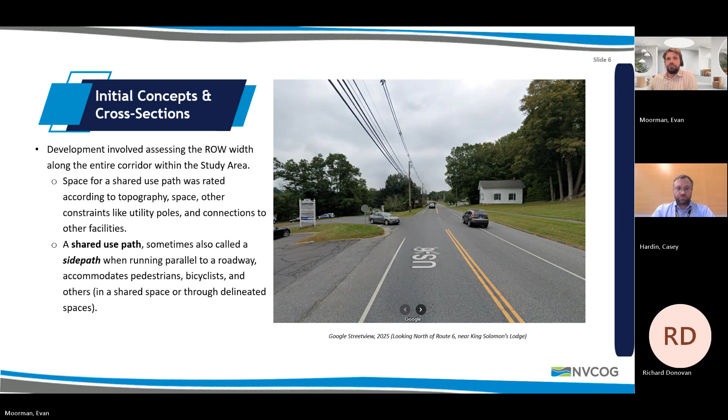We really want to use the design principles to sketch out what this would look like. Shared use paths can have a pretty wide range in width. They can go from about 8 feet, which is sort of an absolute minimum. When you're constrained, and ideally for a short period of time, you can have an 8-foot wide shared use path, and that still gives sufficient space for bicyclists and pedestrians, although they may have to slow down. So you go from 8 feet to about 12 to 14 feet, which is ideal. The wider the path, the more users you'd expect, so the wider the path you would want.

Paths can include a 4-inch center striped area, a yellow stripe, I should say. This is often used with heavy peak hour seasonal volumes. We've looked around at comparable routes in comparable areas, and we do not think this is necessary for Woodbury to separate out bicyclists and pedestrians.

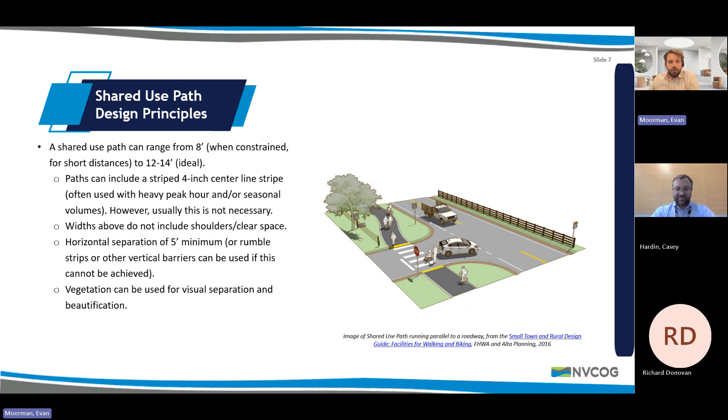Generally speaking, there's also a horizontal separation of about 5 feet at a minimum between drivers and users of the path. This is not always achievable, and if you're in a constrained space, you can use other factors like rumble strips or vertical barriers for small areas, which can achieve the same level of protection that a 5-foot offset would achieve. You can also use vegetation, which is nice, especially in a town like Woodbury, where the tree cover is currently present but also very valued, and we want to protect that. So vegetation can also play that dual role of beautification and providing separation between bicyclists, pedestrians, and drivers.

So here we're going to talk about pedestrian and bicyclist interactions on the shared use path. As I mentioned, they can be divided with that yellow stripe down the middle, but this is not done at the regional level—the Middlebury and Oxford Greenways do not use that center division line because of lower volumes.

We looked at the FHWA shared use path level of service calculator—it's a little dated, from 2006, but still used. It basically looks at volume. If you have one-way volumes under 100 people per direction per hour, it's totally fine not to divide it. As you get higher, you start needing either a wider path or a divided path. This isn't all or nothing—you can put a solid center line near corners with blind turns, or near railroad crossings. So we're going to strategically recommend providing solid center lines where they're appropriate, but not generally.

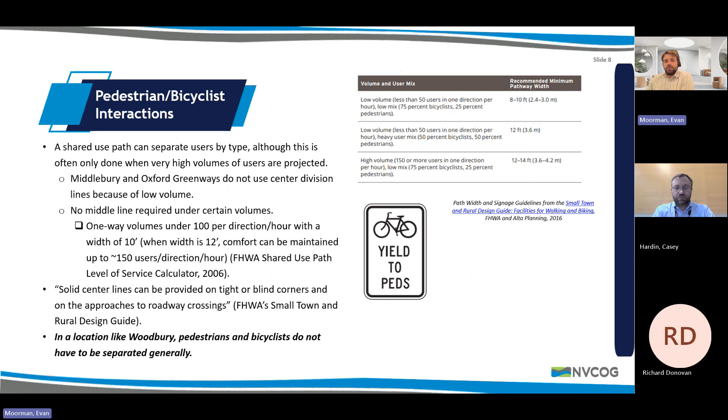I want to go through the right-of-way screening we initially did. We went up and down the whole corridor looking at parcel data in particular, but also street view data from Google and other sources, plus topography data. We went south to north along the corridor and rated whether there's space for a shared use path as best we could see. We have 5 different ratings: no, unlikely, possibly, likely, and yes, along each side of the corridor, east and west.

The east side here is on the south. As you can see in this southern section, it's a little better along the east side, largely because of some topography issues, but also, perhaps more importantly, there are a lot of telephone and power poles on the west side which would be difficult to route around or replace. So that was a very important criteria in the southern section of the corridor.

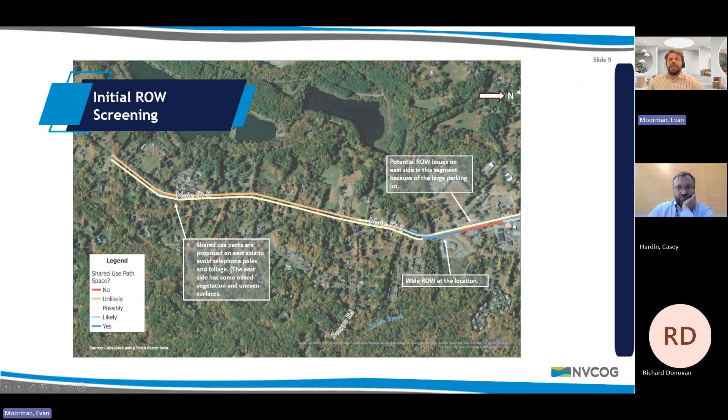Moving into the center section, we also rated it. As you can see, we're proposing that the shared use path would still be on the east side because on the whole it's scoring better.

As I mentioned, on the west side there's insufficient right-of-way caused by telephone poles, and in some areas a culvert. I'm not going to go through all these points, but you can see I've just called out issues and some of the factors guiding which side of the road we're proposing to place this on.

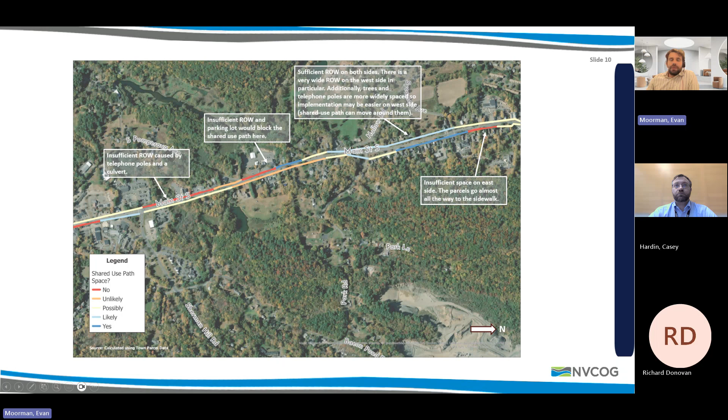It's not perfect. It's imperfect on the east side, though I mentioned it was better on the whole on the southern side. Once you get north of Hollow Road, we get some issues on the east side, and the west side starts to become better in terms of space and right-of-way issues.

So here we are moving north. Here's Washington Avenue, School Street, just to orientate you. So here I was looking at the right-of-way, and it looks like the west side would be preferable. On the east side of town, the east side is superior, and then near Hollow Park, the west side starts to predominate for being better.

As you can see, there's just more space for that shared use path on the west side than the east side. Again, we're sensitive to the historic needs of Woodbury. For example, on the east side of town, the pharmacy extends almost to the street, and there's a very limited right-of-way for a shared use path. That's one of the pinch points that encouraged us to go onto the west side, through the heart of the town, and that's where we end up here.

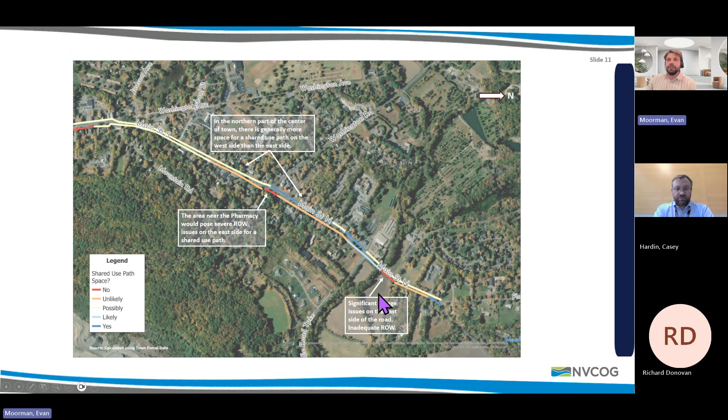Here is the river and the end of the corridor. As a general concept, we're proposing that shared use path on the east side in the southern part of town, specifically from the town border to Hollow Road, Doolittle Hill Road, Park Road area. At that point, it would transition over to the west side, cross the street using a new crossing, and use the west side of the roadway through the central section of town, through the business district, and all the way to the river.

We're also proposing major urban design improvements near Hollow Park to facilitate that crossing, but also to ideally make better use of that space now and boost access to it. We're going to talk a little bit about that later, and more specifically at our next meeting, about what we're looking for at Hollow Park.

And then we have other strategic intersection improvements, which we'll focus on more at the next meeting. Here's just a view of what this would look like in your town. We took two specific locations. The first is on the northern side of town, say between 317 and Mountain Road.

When we're on the west side of town in the business district, we show the existing right of way, in feet, and then we show the future right of way, what we're proposing. This may take some time to digest, but as you can see, we're using the same total right of way space, and we're just strategically taking space from what's a pretty big grassed buffer area, making a shared use path that's nicely buffered from the street, but also from people's homes.

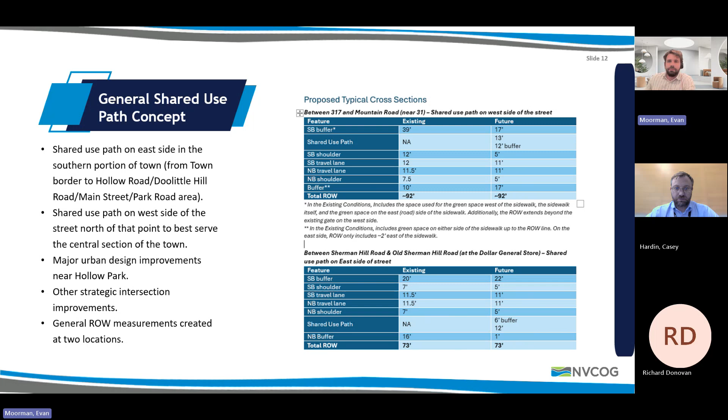So again, I just want to visualize this for all of you. This has call-outs corresponding to the specific intersection recommendations that we'll focus more on at the next meeting. But here we are beginning at the town line, the southern town line, I should say. We go on the east side of Main Street.

We propose to improve the crossing of Middle Quarter Road, adding PED signals, improving signal timing. So we hopefully improve safety, but also, to the extent possible, keep traffic flowing.

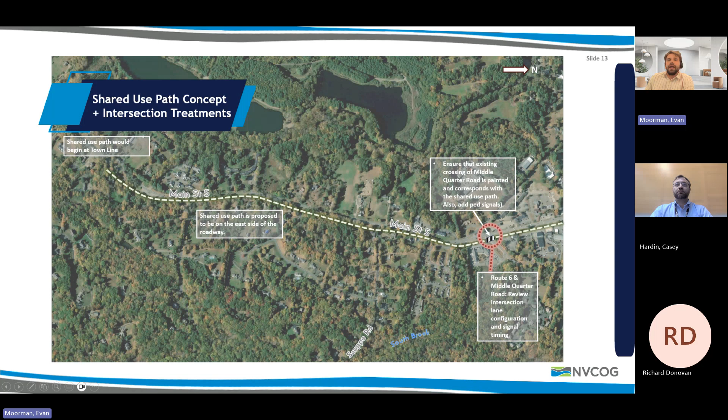Again, we're still on the east side, and then we would basically cross over near Hollow Road from the east to the west side. Here are those proposed changes I talked about at Hollow Park.

We're proposing at this sort of exit off of Main Street at Doolittle Hill Road, closing access to cars, making sure we give land back to the park, reconstructing a sidewalk along Doolittle Hill Road into a small 8-foot shared use path and linking to an existing sidewalk.

And then perhaps more dramatically, we were talking about realigning Hollow Road and directly connecting it to Route 6 with a more traditional traffic configuration, like a 4-legged stop or a signalized intersection. This would require reconstruction of the Woodbury Deli parking lot.

So this is sort of the general design. We are trying to improve green space, improve traffic function, but also take advantage of this crossing to tie the town more tightly to Hollow Park, which we've heard many of you say is a very treasured resource.

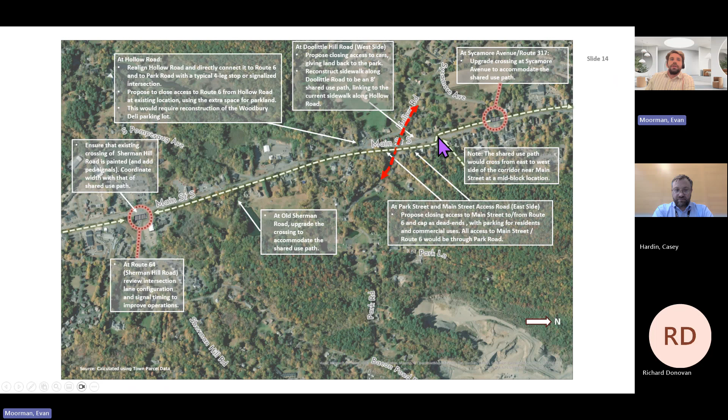We'd cross from east to west near Main Street at a mid-block crossing that would be likely signalized. And then again, we'd go on the west side of town north. Let me go on to the next slide. We'd be on the west side.

We would propose to upgrade the crossing at Judson Avenue. That's something we heard is dangerous and uncomfortable. So we'd try to improve that crossing in particular.

We'd be on the west side moving north using this extra right-of-way space here in front of people's homes. And then at Washington Road and Pleasant Street, we proposed to upgrade the crossing to accommodate that shared use path.

One thing we heard is there's issues at the pharmacy. We'd like to define that area a little bit better. So we're proposing granite curbing and parking striping at that corner pharmacy parking lot, extending the sidewalk northward on the east side. We're trying to strategically improve sidewalks as well as create the shared use path.

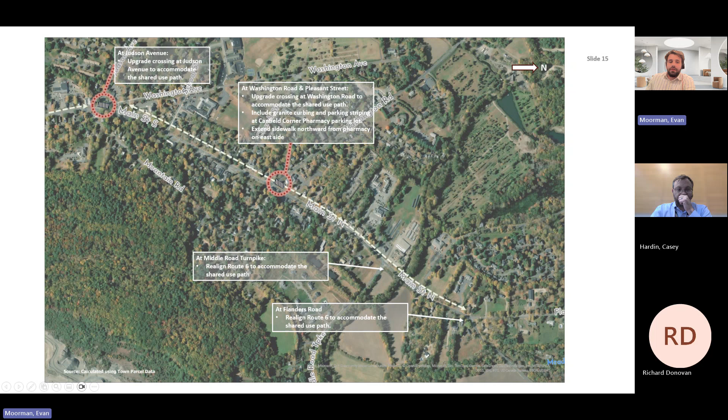And then we'd keep traveling north, crossing the river, and ending at Flanders Road, again on the west side of the road.

So I want to just summarize the intersection concepts, and again, these will be brought up a bit more in our next meeting. We are doing traffic analysis, and we're concluding traffic analysis for everything we're talking about here. At our next meeting we'll be able to tell you definitively what impact this will have, hopefully very minimal impacts on traffic.

But we're currently analyzing those operations at the following intersections: Route 6 and Middle Quarter Road. We were talking about narrowing the westbound approach for Middle Quarter Road, so making it better for pedestrians and bikers, while also keeping traffic flowing.

At the Hollow Road, Main Street area, we're talking about new signalized crossings, changing access points to the park. That was that intervention I talked about just a few minutes ago.

At Route 6 and Sycamore Avenue, we're examining a new left turn lane on Route 6. That's a concern we heard many times about people quickly going around into the shoulder area as people try to turn left. So we were thinking if we could provide a left turn lane there, that could significantly improve pedestrian safety.

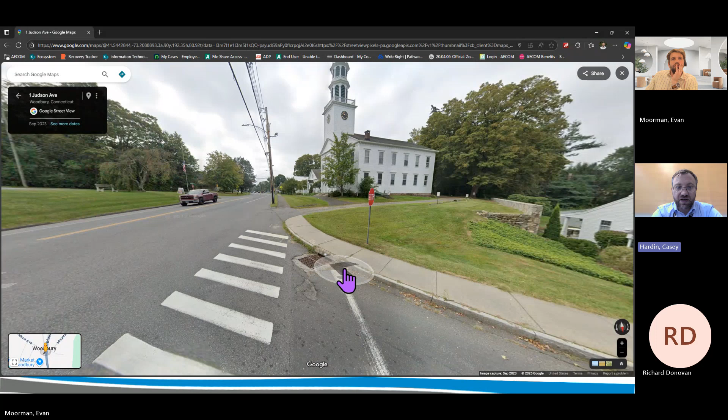I think as we look at the spot improvements, that intersection really flares out and the road widens to encourage that right turn movement. We may be able to better delineate how Judson approaches. Right now it's a glorified on-ramp, naturally flaring wider, and oh, there's a crosswalk and a stop sign. But every other clue tells the driver they may as well just keep accelerating and join Route 6. So maybe it's less of a turn-in to merge onto Route 6, and a little more squared up, forcing more of a stop and turn right.

Thank you for bringing that up. Because of the alignment of the side path, it's going to pull that crosswalk back as well, quite a bit, making it a lot more visible.

Does the shared use pathway replace the existing sidewalk? It's on that side, yes, so it would be on the east side until it switches over to the west side. That would be the pedestrian path, replacing the existing sidewalk. And then there are places where we'll still have sidewalk on the other side.

I can imagine a few places on the existing sidewalk where there's a tree right beside it. You'd have to have the path fall on one side of the tree, or go around the tree, or you'd have to cut the tree down.

What's the thinking about that? Some of those are questions we'll address more in the design phase than here in the concept development phase. But our goal has been to minimize the impact to any trees that exist out there now. I don't know that we could split around every tree, although it's certainly something we could look at, but wherever we could, we would move the path around the tree rather than cut it down.

I should add, in my right-of-way analysis, I did try to note where there were tree issues and where we could go around them rather than cut them down, because I know that canopy is important. Our goal would be, in the actual implementation, to add more trees in and try to minimize any impact to existing trees.

Please go ahead. I see that we go all the way to Flanders Road, right? I'm hoping that the intersection at Flanders and Route 6 is also going to be looked at, because that's a dangerous intersection. People come so fast from Watertown, not realizing there could be cars stopped or trying to leave Flanders Road onto Route 6. Also all the way down to Quassuk Road, people come from Watertown on Route 6 not realizing they're suddenly coming into town. It's always a little difficult coming out of Quassuk Road by the firehouse as well.

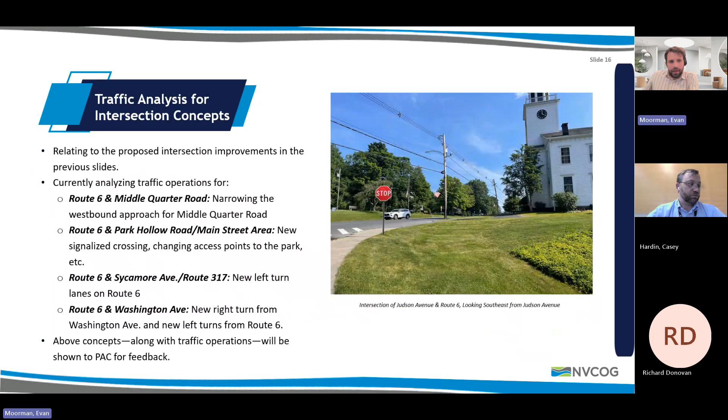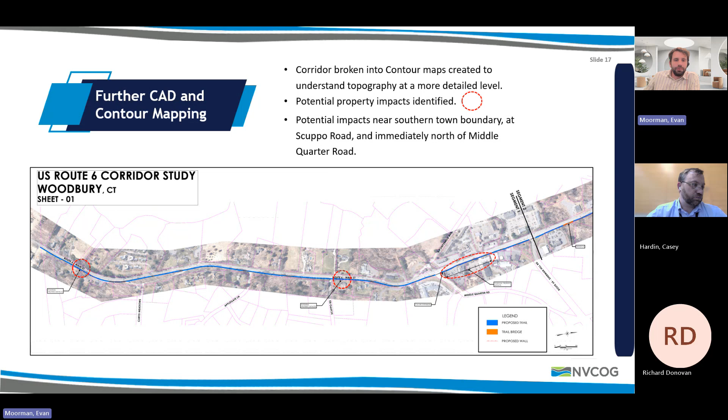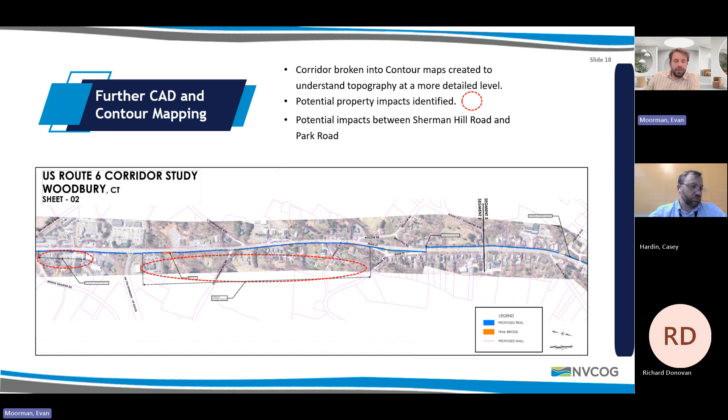So in terms of impact, there's potential impacts near the southern town boundary at Scuppo Road and north of Middle Quarter Road. And then here in this next sheet, as you can see, we've also mapped the possible impacts. I won't go through them individually, but just so you can see the type of analysis that was conducted.

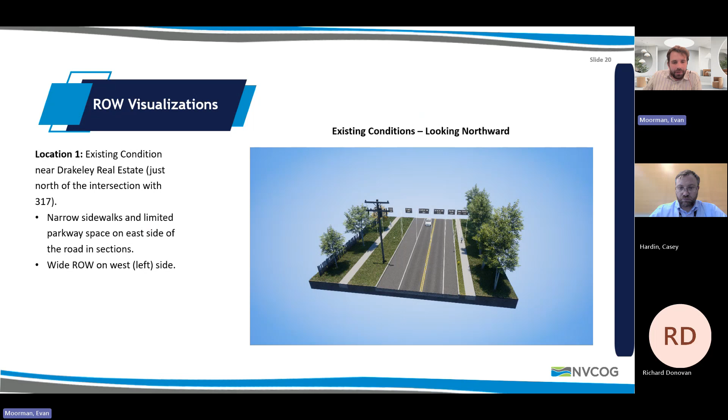Not sure why it's... oh, I'm sorry. So we were seeing it there. Oh, okay, sorry, skipped.

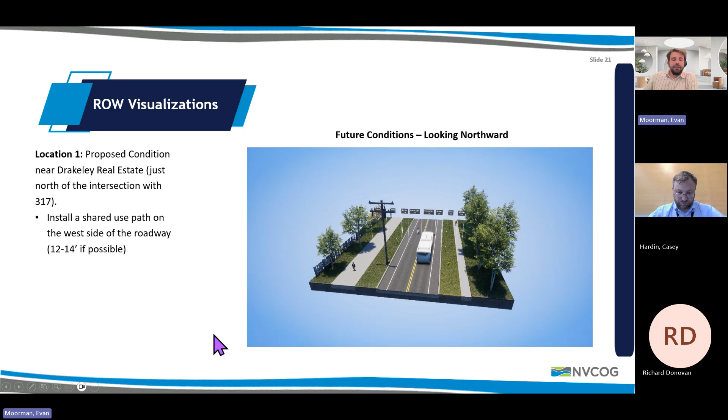Here's the future conditions, again on the west side, looking northward. We're proposing a shared use path of 12 to 14 feet. We feel we can keep the telephone poles and not have to do a huge amount of intrusion there, but provide nice space on the west side of town while maintaining the sidewalk on the east side. We're aiming for 12 to 14 feet if possible, since this is really the center of town, near the community center, the library, et cetera.

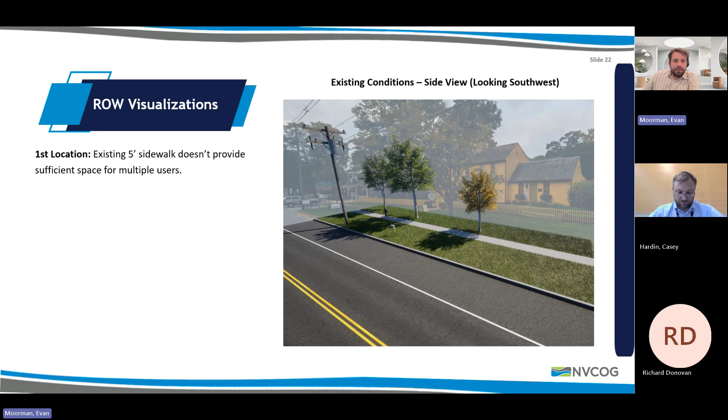So maybe more helpfully, we want to show you what this looks like at street level, again at the same location near 317 Sycamore. Here we're looking southwest, and this is the existing condition: many cars, there's a walking space but it's limited. This shows what it could look like, hopefully providing a lot more space for bikers, people on foot, scooters, etc. We feel that would be quite helpful.

So let me go to this next spot, here on the southern section of town. This is— hold on a second, Evan. Absolutely, yep. I'm a pain in the tail, I'm sorry.

But back to the picture you have of Drakeley, just south of that there's a rather healthy parking area that's used by the church and people for functions. What happens to that if this were to happen? Does that go away and become an extension of that shared use path?

I think we were planning that it would jog out around it. Part of the answer is that's part of what these spot improvements will help us figure out. But our assumption was not necessarily to take that away, that we might just route the side path following the curb line, so like where that car's parked, it would be routed to the right of that. Yes, that was the plan.

We have a pretty wide right of way here, and we've heard that's an important parking area, so the intention was to keep it.

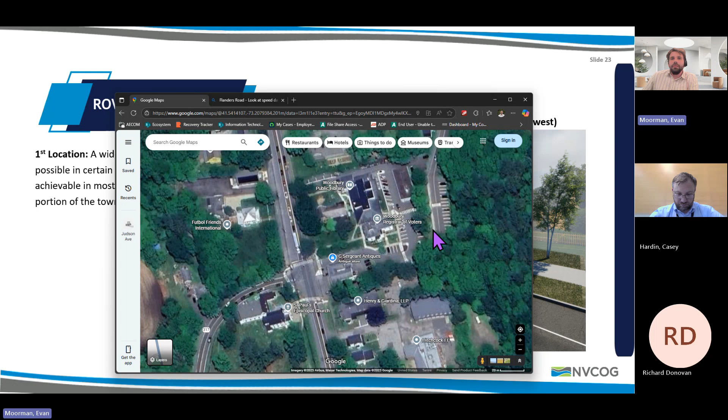We're hopeful that when we bring this to them, they'll see the full intersection concept and agree to the more significant improvement. We'll also talk a little at the next PAC meeting about possible temporary or demonstration-type improvements that can be done in the short term. That whole intersection issue isn't going to get answered here—it's not done yet either. We'll be back.

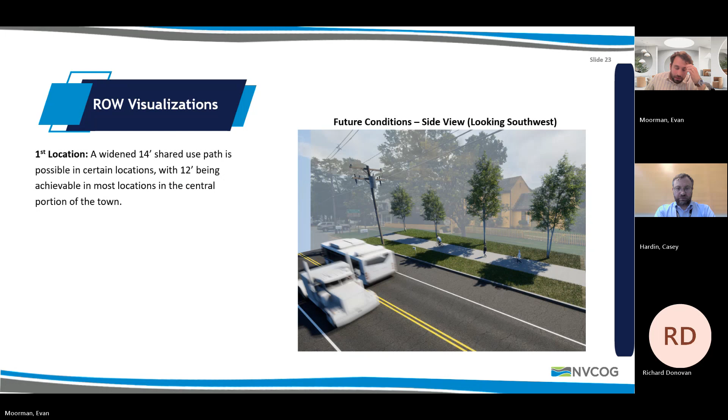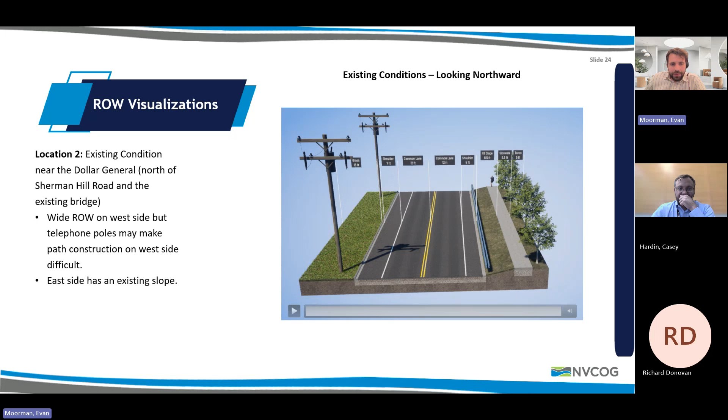All right, Evan, go ahead. I want to move now onto the southern, more rural section of town near Dollar General that we've already talked about. Here we're looking north. We have a pretty wide right of way on the west side, but again there are telephone poles and some other topographical issues. The east side has an existing sidewalk of about 5.5 feet, but it has an existing slope there, as you can see. That's the existing condition right now. These lanes are 12 and 13 feet, respectively.

So what we do is narrow the lanes a bit, narrow the shoulders, and create a wide 11 to 12 foot shared use path on the east side, which would allow all sorts of people to walk. We've heard concerns that people are using this area to walk to the Dollar General or even points north from where they live to the south. We feel this would provide a nice, comfortable shared use path for them on that east side of town.

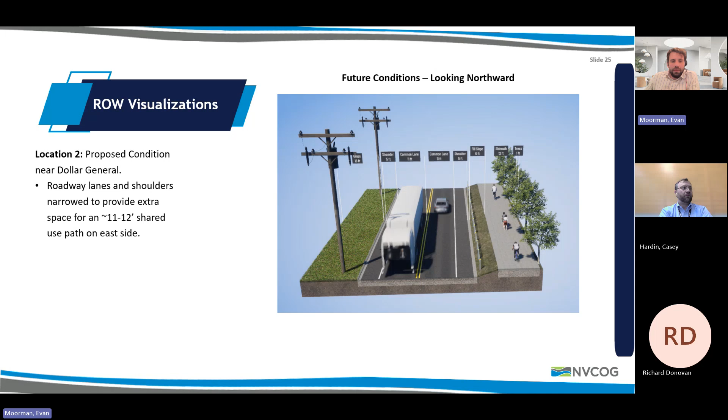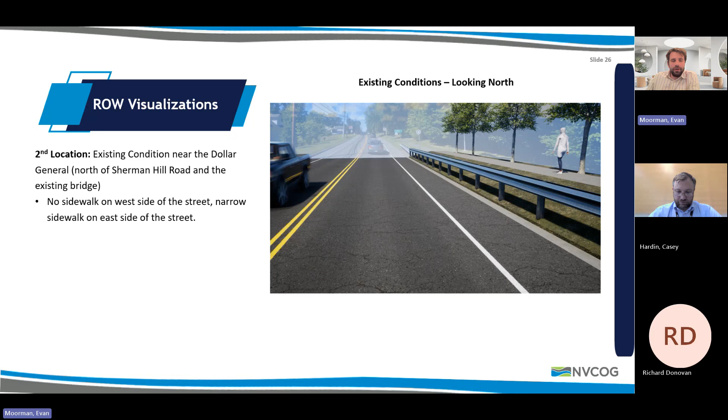And I just want to visualize it at the street level. There wouldn't be a huge narrowing of the roadway, but a modest narrowing. And in the future, more people could bike, families could travel together, people could walk, scooter, etc. So that's the general concept in that southern portion.

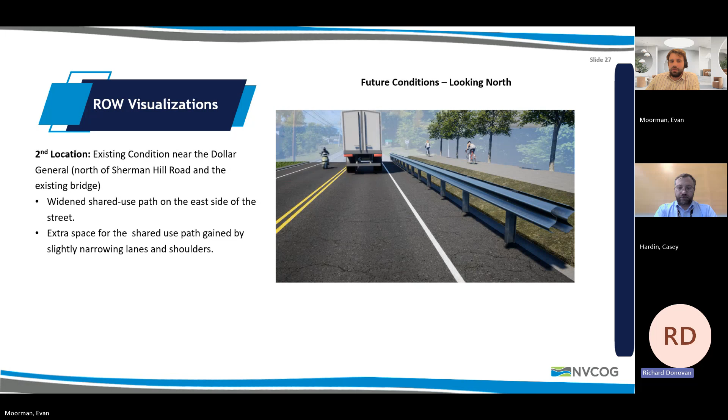And finally, we want to conclude by noting that when we did this analysis, and certainly in the final report, we're going to emphasize and study how this can connect to existing and planned shared use paths in the region. So there's the Middlebury Greenway, there's Oxford Route 67 shared use path. There are coming shared use path investments in Southbury, starting with New Wheeler Road. To the extent that they're somewhat close, we want to create this shared use path in such a way that it can tie into those.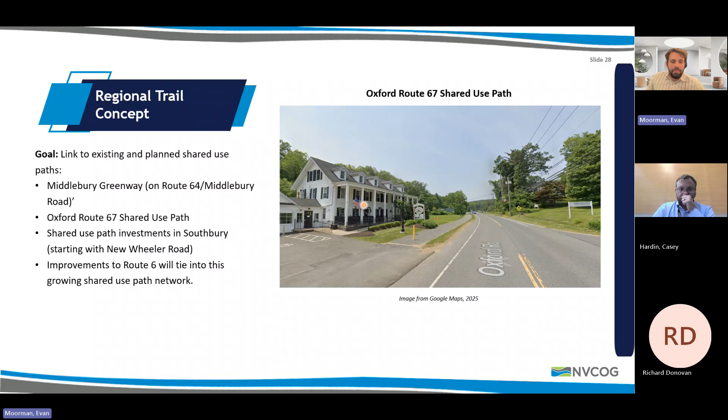Perhaps the most obvious connection is the first one, and how to tie that in on 64. But we feel like we have, by for example putting it on the east side of Route 6, an easy connection right there. This is part of an overall network in the region, and we want to assure you that we are considering that.

So to conclude, we're proposing that the shared use path will be placed on the east side in the south of the town, avoiding those telephone pole relocations and other large impacts that would be expected. Near Hollow Park, we transfer that onto the west side of the road, serving that main commercial portion of your town, and avoiding some right-of-way limitations near Pleasant Street, near the pharmacy. Connected to that, moving east to west, we would propose some urban design access improvements near Hollow Park, which we feel would tie the park more strategically to the center of town. And we sort of touched on it, we're going to spend more time on it in the next meeting, but we'd have some strategic road realignment and signal configuration that we plan to recommend in this plan.

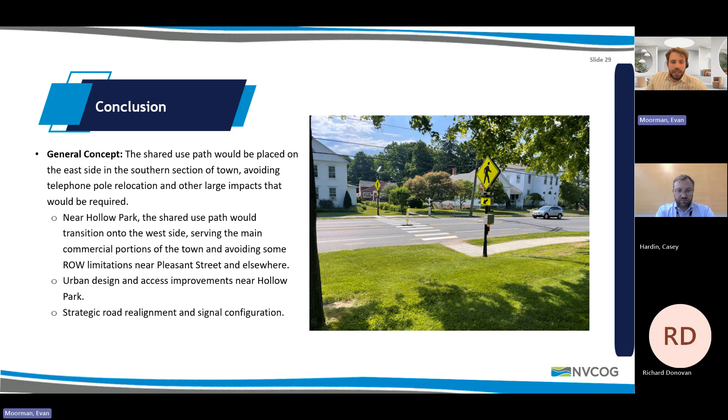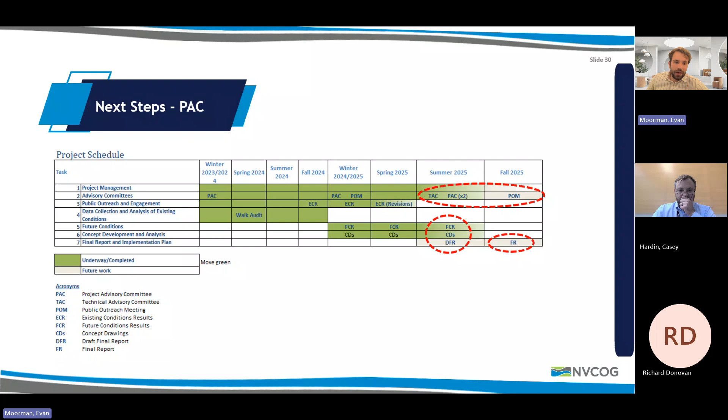So I just wanted to bring the next steps for you, for the PAC, up here so we all can reorient ourselves. As mentioned, there'd be that second PAC meeting where we'd really delve into the specific intersection changes we're proposing, and any traffic impacts of those. That would be the focus of our next PAC meeting, with continuing analysis related to those intersection concepts. And with that, we want to take your feedback, we've heard some helpful thoughts already, but we're all ears for any feedback you may have for the general concept.

Great, go ahead Bill. So dealing with the general concept, I know they're going to the intersections, but also continuous path. One of the observations from my perspective is that there's a big difference between the one that's in Middlebury and the one that's in Oxford. They both do what they need, but the aesthetic in Oxford, at least from my perspective, looks totally inconsistent with where it is. It looks like a giant thing shoved right down in the middle of the property.

No, it's very limited right-of-way, but I think key to all this is the aesthetic as well, because not only do you want a path to walk on, but you want to enjoy where you're walking, and you want it to be related to the things on either side, whether it be the road, businesses, or a house. So I don't know what's built into this or can be built in, but it should focus also on the aesthetic, because I think that makes it more inviting.

Yeah, I think to that point, the reason people are coming here and the reason that this is important is because of the aesthetic of Woodbury and what you have to offer already. And the last thing we'd want to do is take away from that with this. This is a great opportunity to look at where we can add trees and vegetation, where we can do those gateway treatments and other signage that is relevant to the town and fits in with what's here already, and build on the character that's here now.

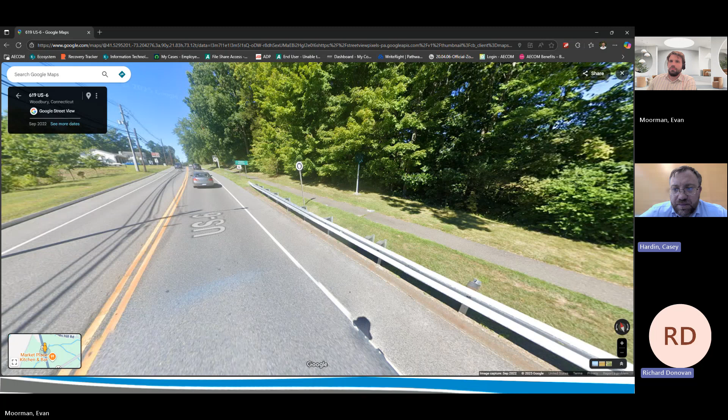Evan, can you turn the section around? Sure. The dilemma here is that the rail is there for the bridge, and the rail has to end somewhere—so the rail is only there because the road crosses the bridge at that point.

In a normal situation, it's not like the rail's there to separate the road from the side path. This is sort of a unique situation. We could maybe look at whether it needs to run back as far, but that's a good point.

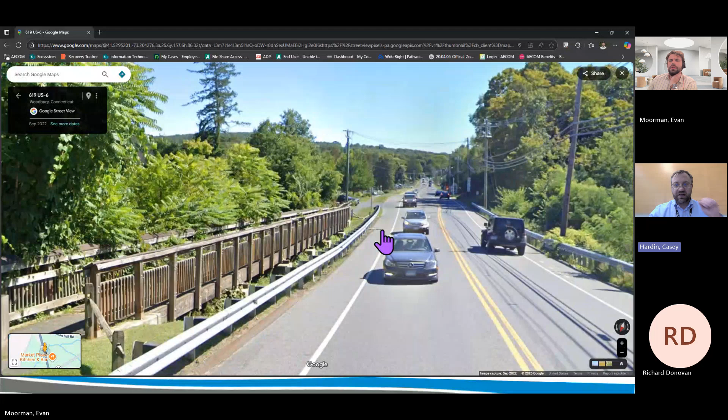I completely understand the aesthetic concern, but that wouldn't change because they're all federal standards, not state standards, and they won't change. The wooden guide rail, designed for the Merritt Parkway, I've worked with municipalities that tried to push for it. The state really is against it because of how hard the replacement parts are to procure.

For years we used to be able to do weathering steel guide rail, but there were strength tests done in wintry climates showing it tends to lose strength when big snow packs pile against it all winter. So unfortunately from an aesthetics perspective, it's the metal beam rail or nothing. That leads us to minimize the need for it wherever we can, pushing the slope shelf back as far as possible.

Then all we need is the wooden pedestrian fence you see in the background. That looks better. There are little guardrails with less profile too, but I don't know when they decide one is good versus another. Right now there's a standard, getting back to the federal standards, that when you're going over a certain point, they have to meet a certain crash criteria. So it is what you have to put in.

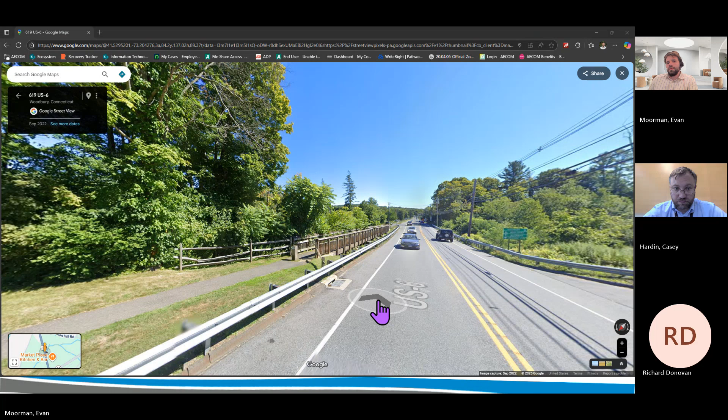I noticed you talk about Southbury and Middlebury, which is part of New Haven County. Woodbury is Litchfield County, and 90% of this driving is historic district. One thing people love about Woodbury is the small town charm, like Washington and Roxbury. We're on the edge of this, and I hope you're considering thoughts from the historic district, because I think we don't want to lose that for our real estate. A lot of people say Woodbury reminds them of Vermont, where else do you find that? It's a small, wonderful little town. You have to be careful we don't become a metropolitan look.

Yeah, for sure, I echo that too. I'm also skeptical from a maintenance perspective, going back to Kathy's original point. A wide pathway invites teenagers and others to drive 35 miles an hour or as fast as they can down it, honestly. I think an ADA compatible sidewalk would be a much better approach. I also sit on the board of finance, so I'd be interested in the cost per 100 yards of the different options, and where everything is going to come from. That's my own personal interest, maybe others don't care.

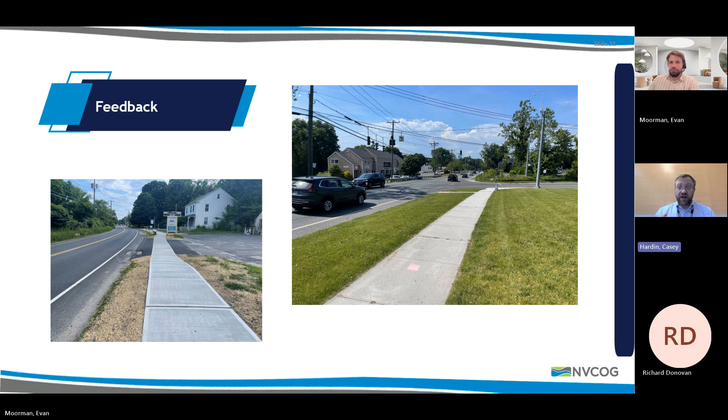What we'd like to do is build in a combination of vegetation and some signage—envision something like a 'welcome to Woodbury' plaque. So as you're approaching the area where we want drivers to slow down, we're going to hit them with some sort of visual, like, 'oh wow, I'm in a different area now. I notice all these trees, and there's a couple signs welcoming me to downtown Woodbury. Okay, I should slow down—I'm not just ripping down Route 6 anymore.'

So the potential is there—and we have some diagrams we could share in the future—to do something like that at 6 and 317, 6 and 47, and 6 and 64, and 6 and 61, because people come flying in from some of these intersections.

That's the other way to catch them too—we have to catch people on Route 6, but you raise a very good point that all those people on the major intersecting state roads, we kind of need to introduce that fact to them as well. So that's a good point to think about, the gateway needing to touch on those roadways too.

Yeah, and I have some hesitation as a resident about sharing my space to walk with the bicycles. Not as much the manual bicycles that you power yourself, but the electric bikes, because I've had enough experiences with them at all different hours in town, and you just can't control them. If they should lose control and fall, then we fall too, and it's going to hurt. It's going to be a problem, and so I have hesitation. I know they're here to stay, but sharing the road with them, I don't know.